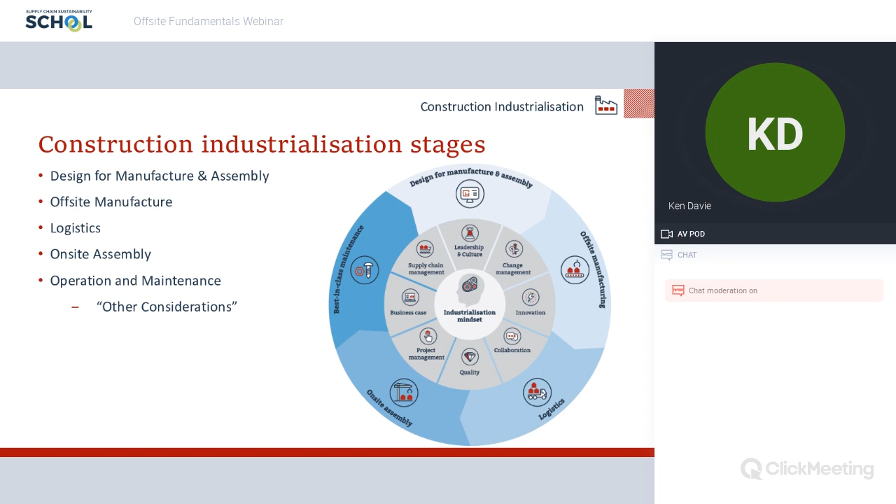What I'm going to do is go through design for manufacture and assembly in a bit more detail relative to the RIBA plan of work, and then look at the other four headings and throw in the other considerations. So the bullet points are actually the five basic construction industrialisation stages, and I've tacked on a few other things to think about at the end of this particular section. Just a reminder of the fractious nature of the construction industry.

Digitally enabled construction is a key driver for offsite and MMC. It's getting designers to understand, at a basic level, that what they have actually designed can be manufactured. Have they actually thought about manufacturing tolerances? Have they thought about the manufacturing process? Have they made what they've designed simple and easy to assemble on site?

The Japanese have a term called poka-yoke, which is intended to be foolproof assembly. And examples of that are the plugs on electrical cables. At a basic level, a 13-amp plug is designed such that it can only go into a power socket in one particular way. And I'm sure on construction sites we've got the same with the IP-rated cabling. The plugs can only fit one way, so they're actually foolproof. And that simple philosophy can be applied to design in terms of how interfaces are achieved, such that they can only be made in one particular way.

So looking at the RIBA plan of work and design for manufacture in particular, you may think that before you even have a project that there's nothing to do. However, this is the ideal time to start speaking about MMC and Offsite to your clients and trying to get some sort of commitment. It would also be a good time to actually think about defining the strategy, fixing the strategy perhaps even, and also thinking about what the benefits and opportunities might be for a particular development, even if it's just an initial thought as to, I need this type of building from a client.

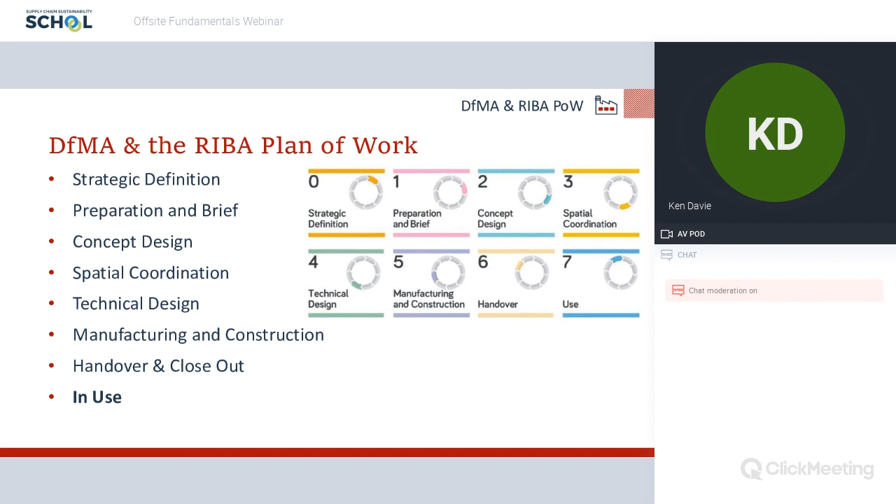The next stage is actually offsite manufacturing. This course is obviously focused on architects and designers, and you could ask the question, what does a designer need to know about offsite manufacturing from a fundamental perspective? Timescales are critical. I've mentioned design freeze and basically having fabrication drawings signed off before any manufacturing commences.

Product availability: is there sufficient capacity in the marketplace? Is there adequate capacity even within the suppliers that you're looking at? If you think about the recently or almost complete 40-story tower block in Croydon, which required a huge number of volumetric modules, it's how many manufacturers can actually produce enough to keep the site assembly process running to schedule. Quite a few obviously have to be stockpiled before they're taken to site.

There are something of the order of 50 volumetric modular suppliers around the UK with obviously varying degrees of capability. And in the wider marketplace, obviously, Europe and the world in terms of what's available by way of assemblies and components. There was one scheme I worked on in Battersea. The bathroom pods had to be imported from Belgium simply because the UK market didn't have the capacity to actually supply.

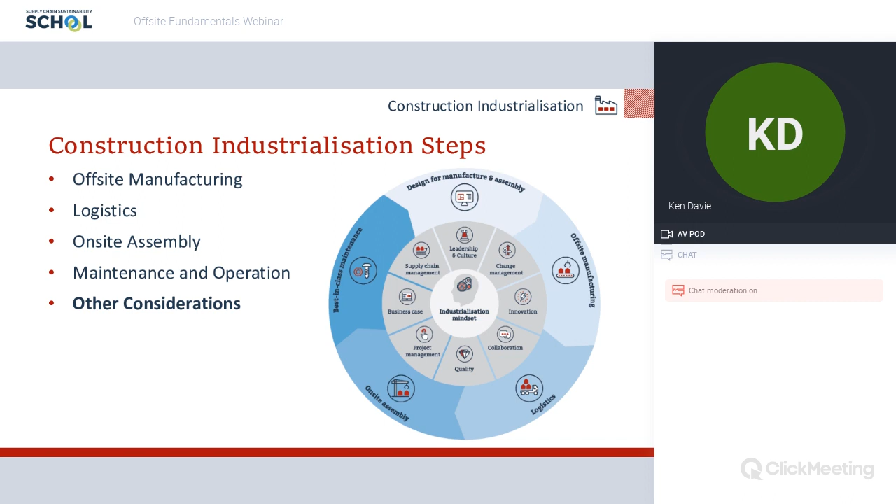Obviously, as the standards are beginning to develop and offsite and MMC are becoming more common, the mortgage lenders and financiers are accepting that they can insure them with some degree of confidence. And then I've touched on it already, collaboration and alliancing. As DFMA and MMC gain momentum, there has to be more collaboration across the industry to actually make it work.

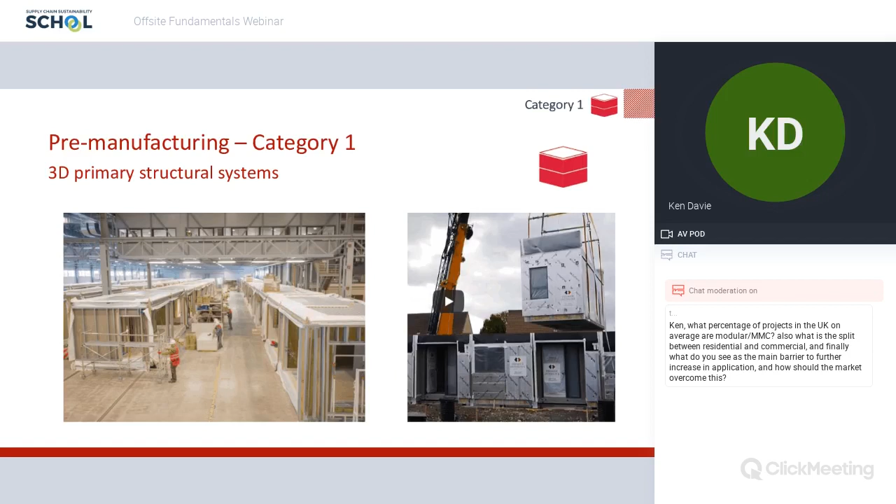Category 1, 3D primary structure is the definition. 3D primary structure is basically a box, a volumetric box or module. Interestingly, this category does not include pods and utility cupboards, which are designated under another category. Something that quite a few people don't appreciate is the difference between point loading and line loading for a volumetric module. Point loads on the left, hot rolled steel chassis with potentially cold rolled or timber infill, and then on the right, line loaded cold rolled steel module.

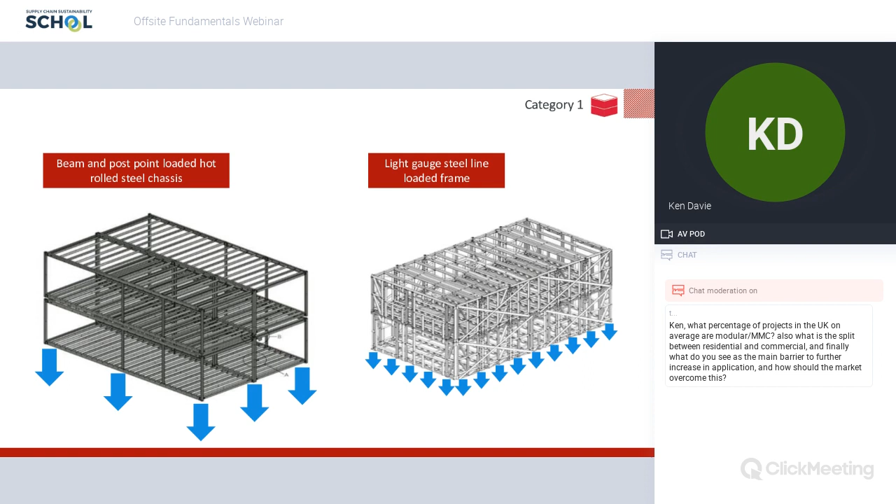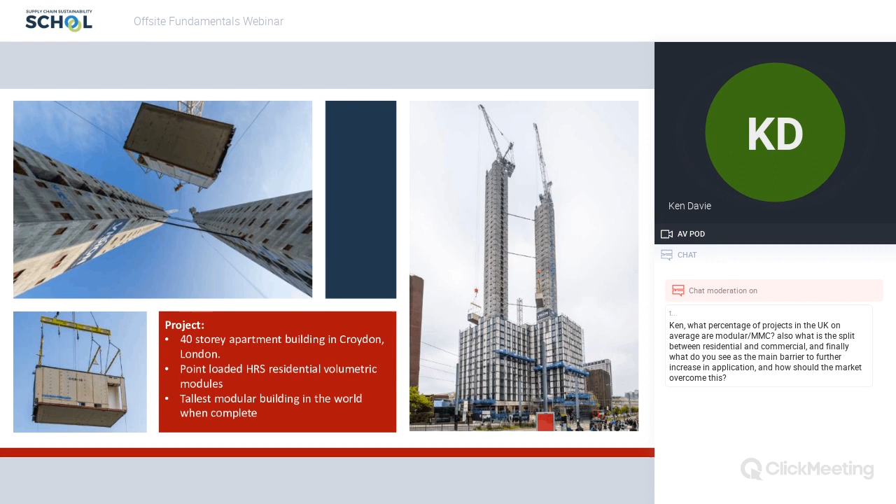An example of a volumetric module, probably at the extreme, as it will be the world's tallest modular building once it's finally complete. These are early photographs from George Street in Croydon. The structure has been topped out. I think it's being finished off inside at the moment. Residential accommodation directly across the street from East Croydon Station. I think that train line will get rather busy once things clear up in terms of the way we're behaving at the moment.

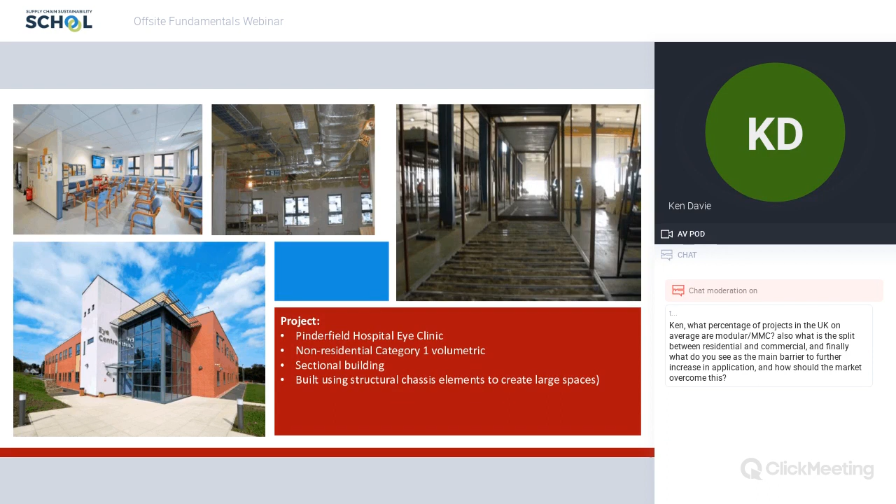This is described as a sectional building, obviously non-residential commercial space with the chassis, basically the hot rolled point loaded chassis used to create the space with varying degrees of finish. Some may have outside walls, some may have internal walls, but they're assembled in the final solution to very quickly generate a volume which can then be fitted out internally on site.

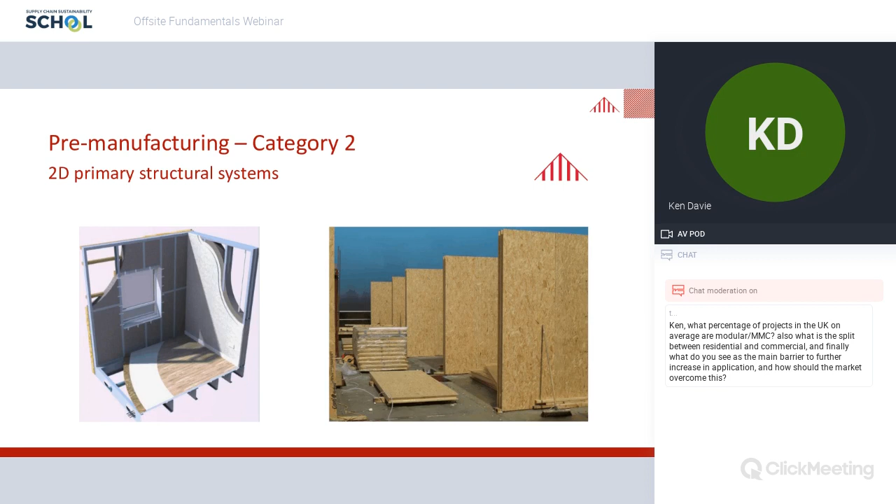Some other examples of the category 2, 2D system, is light gauge steel prefabricated panels, cross-laminated timber used for a staircase, which is actually quite attractive. And in the closed panel system, I think that's actually in a factory in Glasgow for housing, where external, internal finish can be applied, the windows and doors, etc., everything fitted before going to site.

And then going on to the next one is actually probably my favourite material. You probably get fed up of me speaking about cross-laminated timber. This was a development by Mace near the Elephant and Castle, 8 stories. Material was actually imported from Austria, as the UK doesn't have the capability to actually manufacture. The timber is good enough. Napier University has actually tested the quality, and the materials are actually good enough, but there's no one in the UK currently manufacturing to the scale that could supply this type of building.

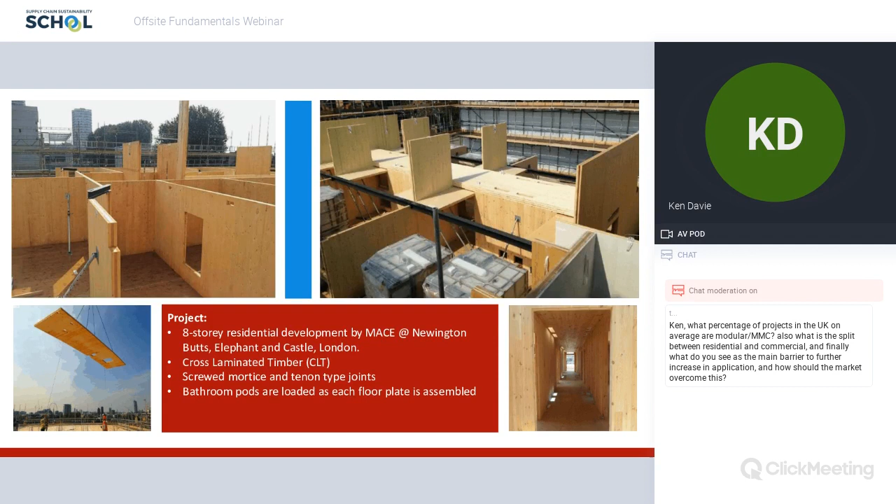There's a bit of castellation and almost like the old-fashioned mortise and tenon joints when the panels go together. And then when they are fixed, it's actually long wood screws. So again, much quieter than, say, concrete and steel, or certainly steel construction. And the floors are inherently stable, as you can see with the pods being loaded as the construction progresses. And you can do lots of things with cross-laminated timber.

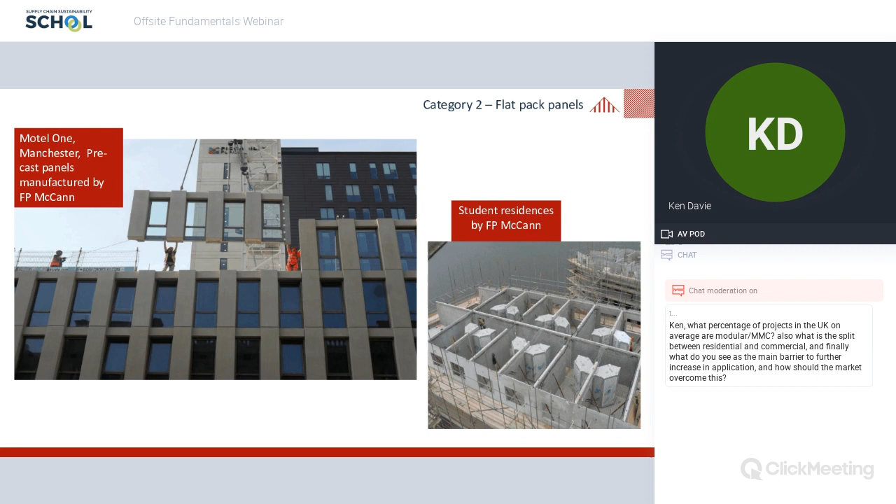And extending again into the flat pack systems, this is an FP McCann Hotel in Manchester, where a unitised system is being built without the need for scaffolding. And then on the right, you can actually see a cross-wall system with the pods actually dropped into place again. The image on the right requires no external finish, just straightforward off the steel mould, flat pack concrete panels. And then a brief explanation of the cross-wall system flat pack panels on the left-hand side as to how the system actually goes together.

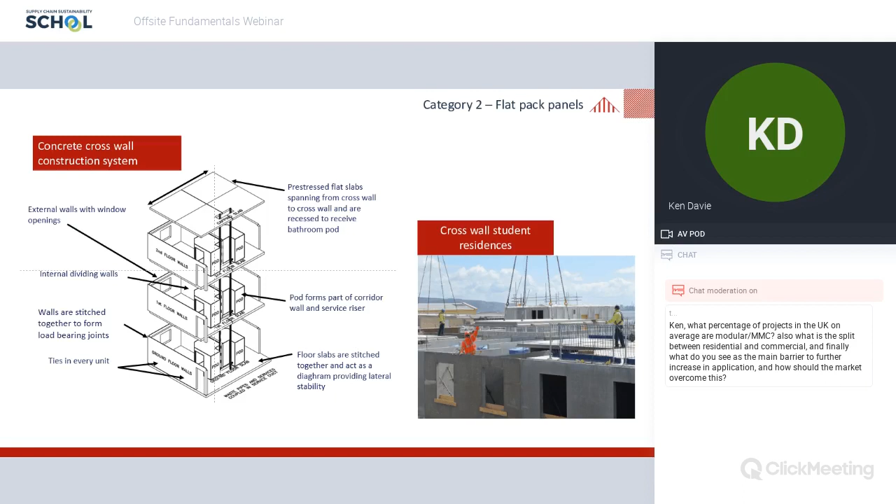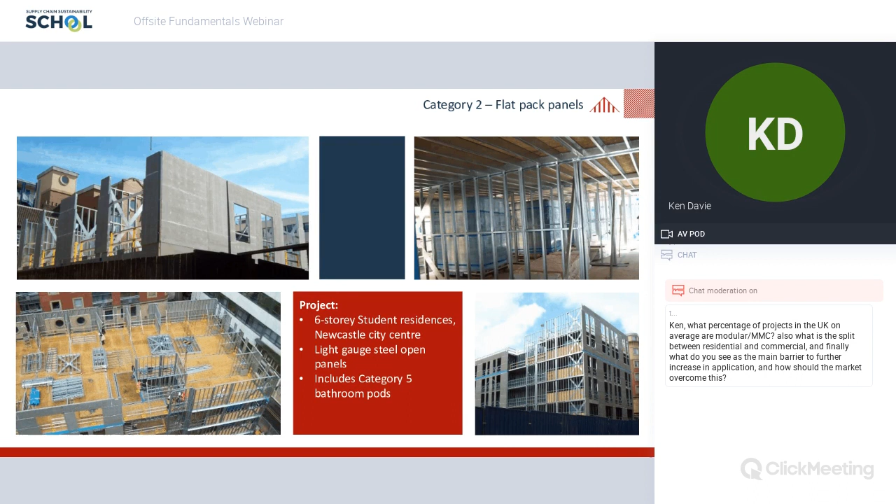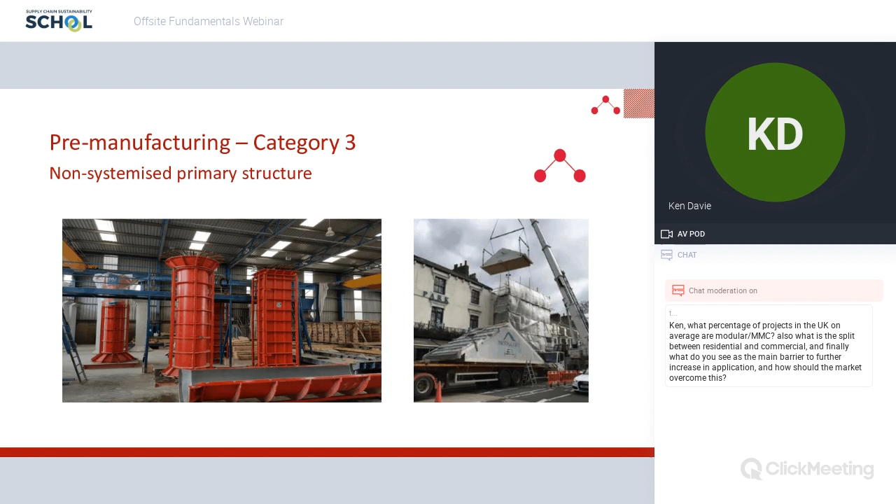And so the flat pack system keeps going on. This is another example of the light gauge steel panels. This is a student residences in Newcastle. Category 3, non-systemised. Architectural columns cast in the yard in Cheshire on the left, and then a prefabricated loft extension on the right, categorised as non-systemised structure. And other things coming into that are glue laminated timber.

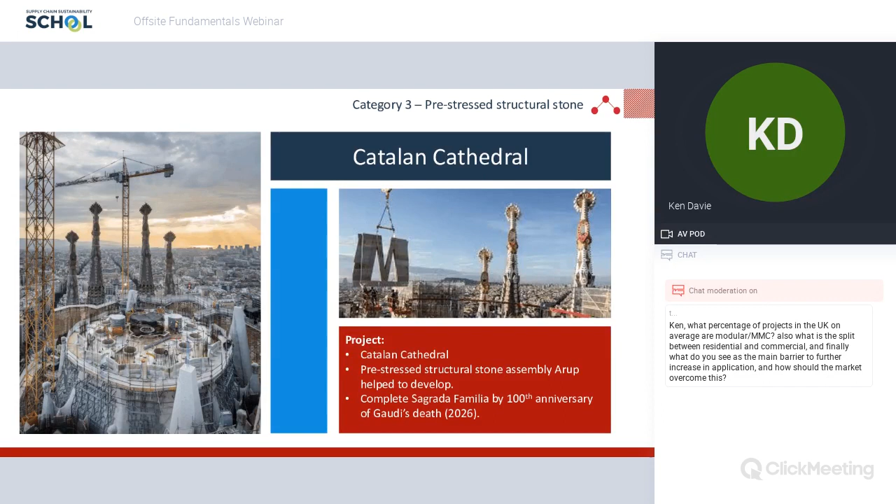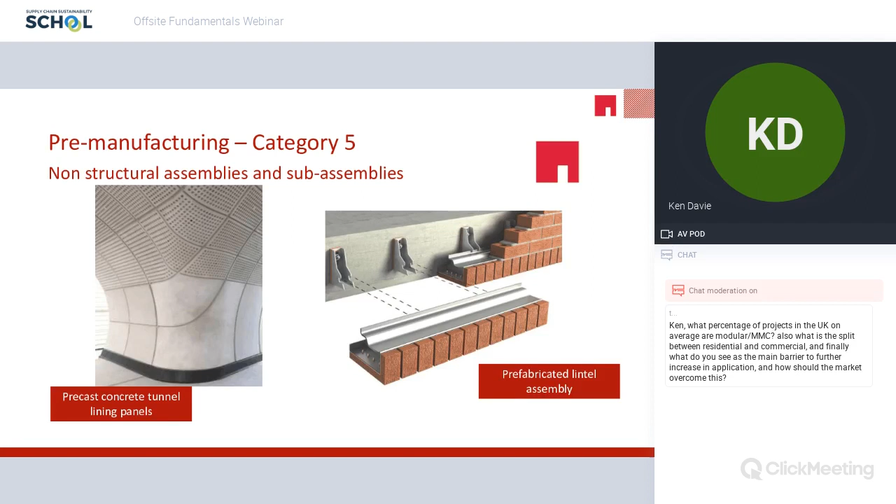And then we go into category 5. A couple of examples is the Crossrail tunnel linings on the left, and a little lintel assembly from IG, which is manufactured obviously off-site and clipped into place. And the bricklayers turn them upside down, such that they can point the bricks on the bench, and they don't actually have to crane their necks and potentially cause injury when they're trying to do it above their head on site once the lintel's actually in place. So I think the point here is that it need not be 3D modular to be off-site or to be MMC. There are lots of little things that can be used, assemblies, products.

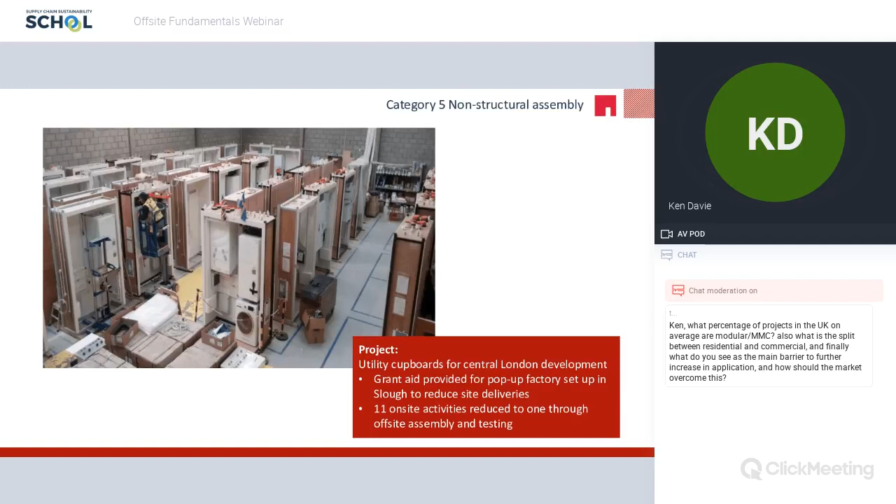One of the most common things in residential accommodation, certainly high-rise, is the utility cupboard. And in this case, these cupboards were actually manufactured for the Battersea redevelopment on the south bank of the Thames. And you can see the metrics there, 11 activities on site reduced to 1. And within the controlled environment, there's no clash of trades. There's no plumbers climbing over heating engineers, climbing over electricians trying to get into the one small space in the apartment. So quite significant benefits in that case.

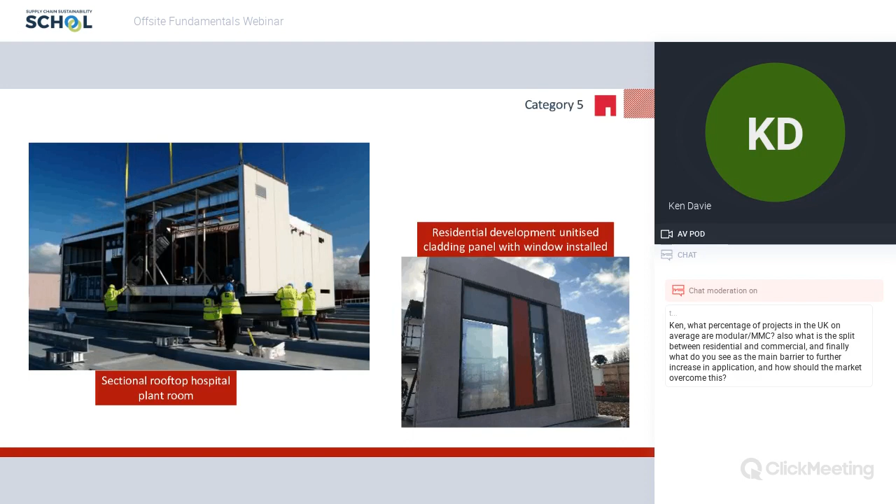MEP versions, obviously, modularized plant room, rooftop plant room. And again, in the non-structural, is basically a unitized cladding panel with the windows already fitted. And other examples, as I said earlier, these are 3D structures, but they're not classed as category 1, they're category 5 in terms of the framework.

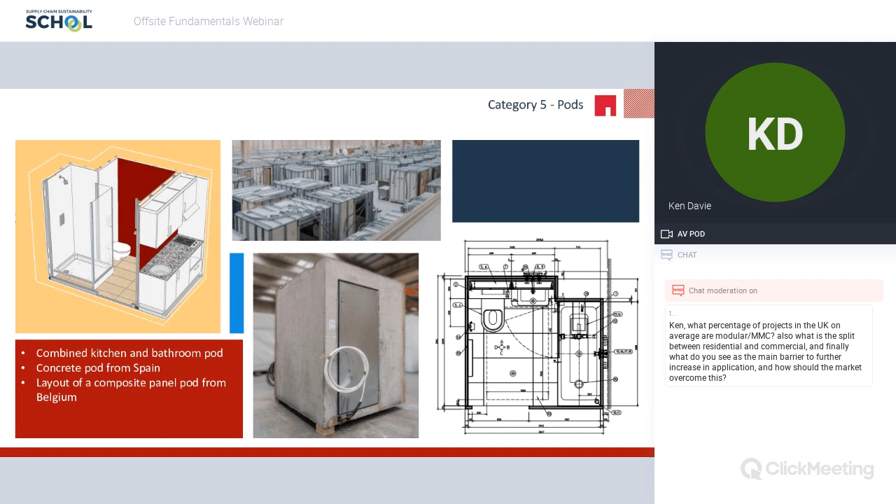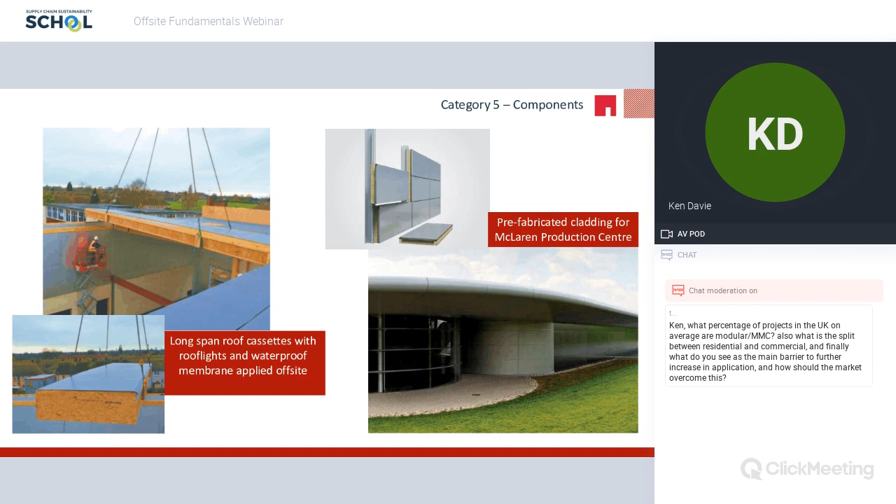And long span roof cassettes and obviously cladding panels, still all part of category 5. MEP assemblies, service risers, sectional plant rooms, and even down to the smaller scale prefabricated valve assemblies. And then the horizontal distribution modules. I think NG Bailey installed something of the order of 1.5 kilometres in one project in Aberdeen, which actually then reduced site labour by something in the order of 60 to 65%.

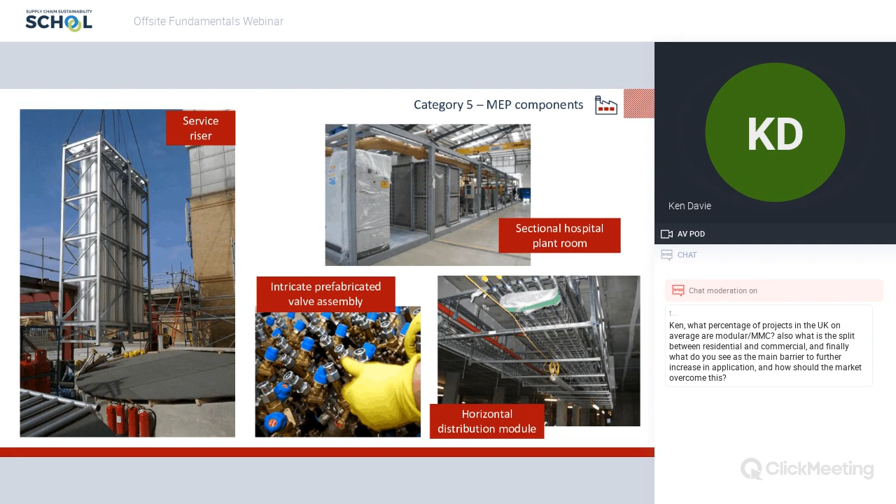Additive manufacturing, category 4, essentially 3D printing. An interesting example in Holland, actually, the stainless steel bridge. I'm actually trying to find some photographs of that installed, but everything that seems to come up is still not that particular image, but they have load tested it by having people walk across it in its current location.

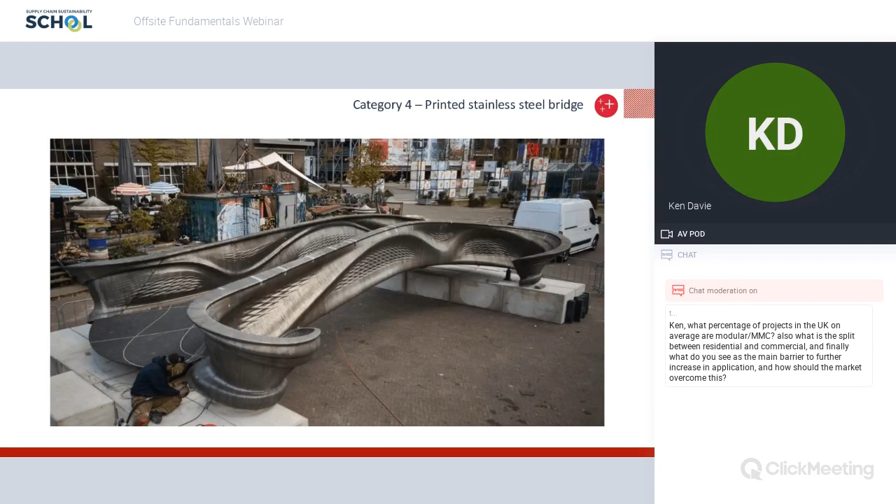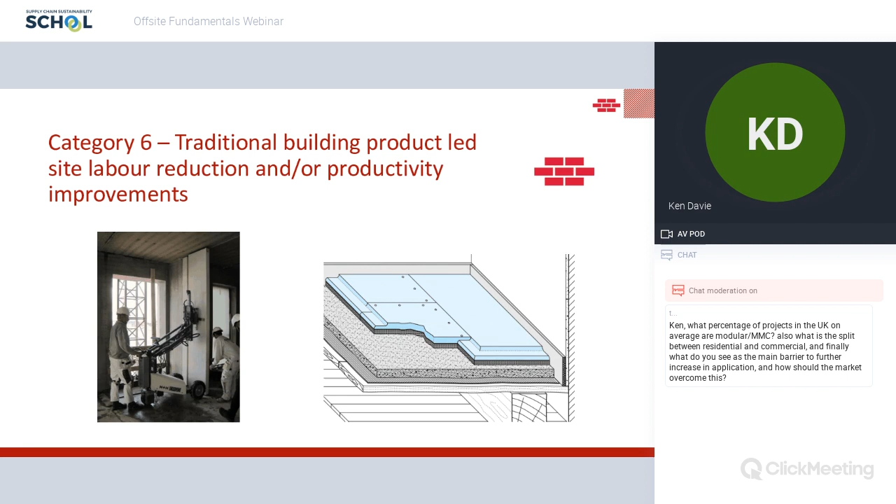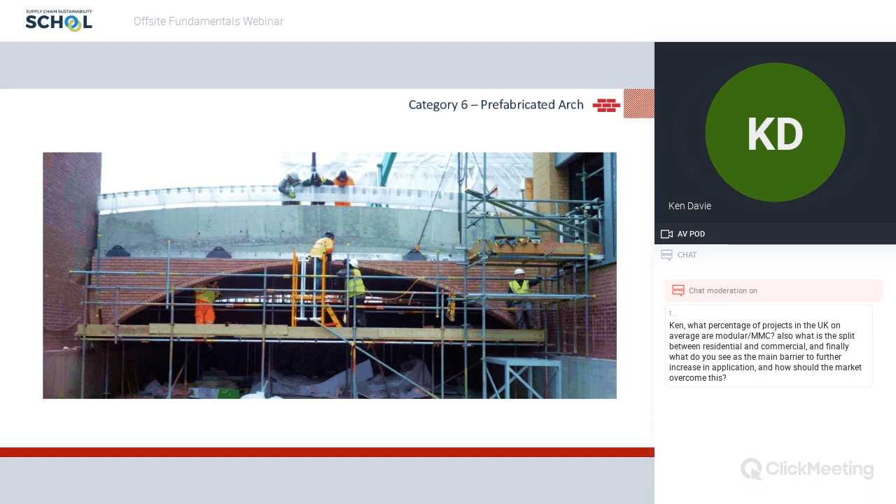And in category 6, labour reduction, productivity improvements: a storey height block from H&H on the left, and then a dry screed board on the right, which is obviously much faster to install than a wet cement screed, and also uses a fraction of the water content. So not just productivity improvements, but obviously environmental potential as well. And as productivity, again, small scale stuff. This is a prefabricated arch for a development, Chelsea Harbour.

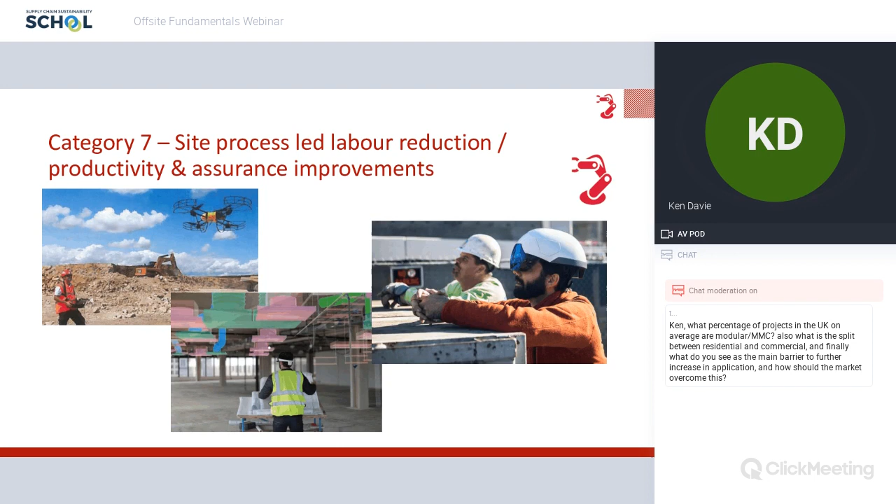And then finally, category 7, productivity and assurance improvements. We've got drones, we've got HoloLens. Obviously, the application of technology has the potential to have a massive impact on the construction industry. I think we're only dipping our toe in the water at the moment in terms of what we're actually using. Visual augmentation, physical augmentation with exoskeletons, goodness knows what else in terms of the technology that could be employed.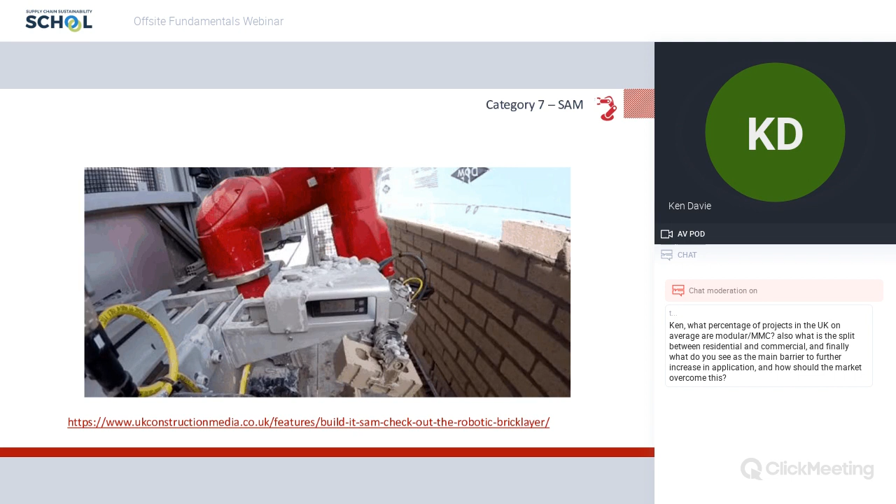And then finally, in this section, this is Sam. This is a semi-automatic mason, and you can actually check him out on YouTube if you just Google Sam, I think. And that's the end of our session on the framework.

That's great. Thanks, Ken. I think if you want to give the recap and then see if there's any questions. I'll hand it over to you.

Yeah. Okay. Brief recap, everyone. Benefits of offsite. Obviously, we've got the programme benefits. Timelines are shorter. We've got the value. So the use of standardized components and platform design has the potential to improve value because you're not having to redesign them all the time, rethink them. Productivity, because an average factory is 85% compared to 35 to 40 on a building site. Working in controlled environments with fewer construction or assembly personnel required.

Designed in the computer, virtual design, and then prototyped once it's actually been designed. And I know I've used prototypes earlier and said not to design prototypes, but test and agree quality and standard offsite. And obviously there's less waste, better opportunity for recycling if it's done in a factory, and with a higher building standard, better air tightness, then reduced carbon emissions.